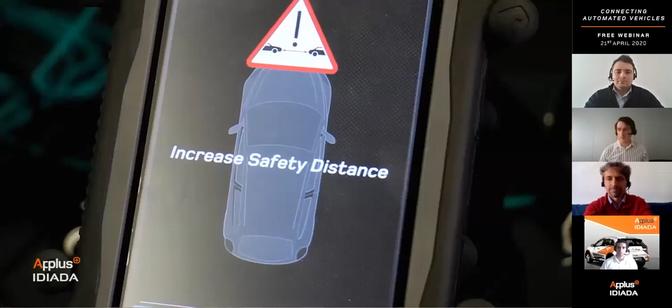So I hope that gave you a flavor of IDIADA's capabilities. In terms of locations throughout the world, IDIADA is based in pretty much all continents apart from Australia. We are representing here the main centers for engineering, testing, and homologation in the form of our headquarters in Spain, our Czech Republic, our China branch, as well as Germany, Brazil, India, US, and also UK.

We also have branch offices where we have key account managers like myself based and/or homologation representatives supporting us with local regulations to be able to best support our customers. In total, we are 2,750 worldwide, and we believe that we are offering comprehensive services to our customers in the form of full development from engineering, testing, as well as certification support. Next slide, please, Dave.

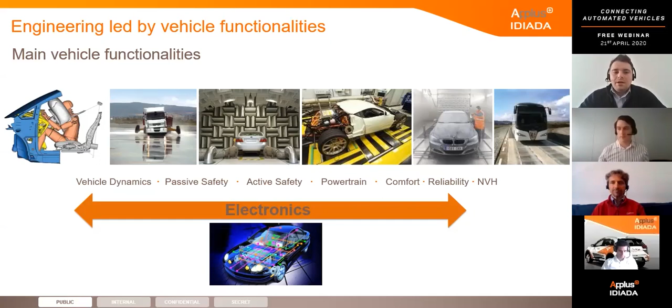As you've seen in the video just a minute ago, IDIADA has capabilities in all vehicle areas, and we have knowledge in main vehicle functionalities in which electronics play a key role, and we have around 100 people worldwide supporting with that. So we are supporting our customers with vehicle dynamics, passive safety and active safety, powertrain, comfort, reliability, NVH, but not only. Next slide, please, Dave.

Now, focusing on electronics, as I mentioned before, we have a team of more than 100 engineers based in our headquarters in Barcelona, Spain. A second team in terms of size is based in our UK office in Cambridge, and three more project-based teams in Pune, India, Germany and Czech Republic.

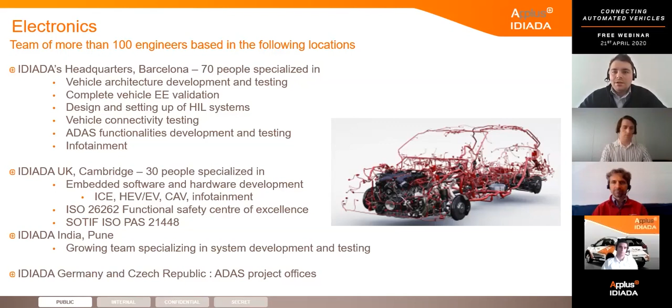In headquarters, my colleagues will explain further, but we have a variety of services that we are offering to our customers, not only in the ADAS field, but in traditional electronics as well. In the UK, we have more of a focus on connected vehicles, on functional safety, and SOTIF more recently. Next slide, please, Dave. So I'm going to hand you over to Dave now, who will introduce the IDAPT in more detail. Hi, thank you very much, George.

As I said earlier, my name is David. I'm heavily involved in our connected vehicle and V2X activities, and one of my additional roles is also the product coordinator for our IDAPT unit.

So essentially, what is IDAPT? In summary, IDAPT can turn a non-connected car into a connected car for a number of different connected and automated vehicle R&D and proof of concept activities. It was a tool that we developed in-house in our electronics department, and we're using it on a number of different projects.

We wanted a tool where we could develop proof of concepts, nice R&D activities, but we also tried to make something that could function independent to a vehicle's electronic architecture system, but also work just as well and possibly much better when it's integrated with a vehicle's electronic architecture. So that might mean something like integration to several of the CAN buses within a vehicle, also integration to additional components, whether it's over something like digital or analog inputs, outputs, something Ethernet based, USB based, other forms of ways to get into a vehicle's electronic architecture.

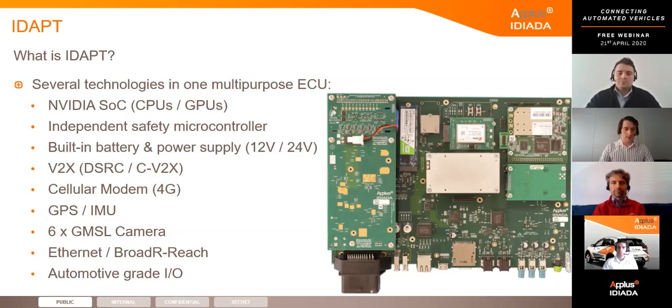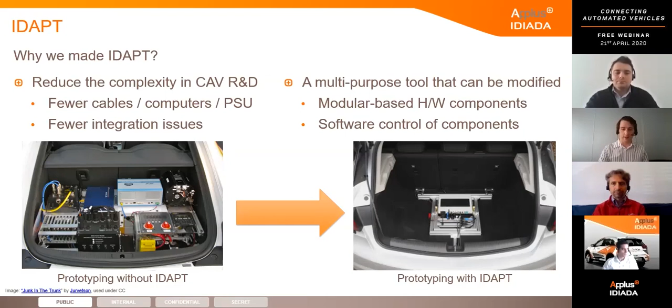And as you can see, how we tried to highlight IDAPT is reducing all these components down to something much smaller in the vehicle. And we're using IDAPT in a number of different ways. So for example, your automotive IoT proof of concept. So you may require to collect some data from a number of different sensors, aggregate that data and also push it somewhere, whether it's to some backend server or some internet-based location.

Cybersecurity R&D. So we're working on a number of projects which involve some form of cybersecurity, whether it's application-based or V2X-based. Because we have this flexibility in our unit, it makes it a lot easier to carry out those types of activities. Vision and sensor R&D. So we have camera inputs and high-speed data inputs such as Ethernet, so we are able to carry out some R&D for vision and sensor. And vehicle actuation, which we'll show a little later, is how we're using IDAPT to perform some form of vehicle actuation on a vehicle. And also V2X R&D.

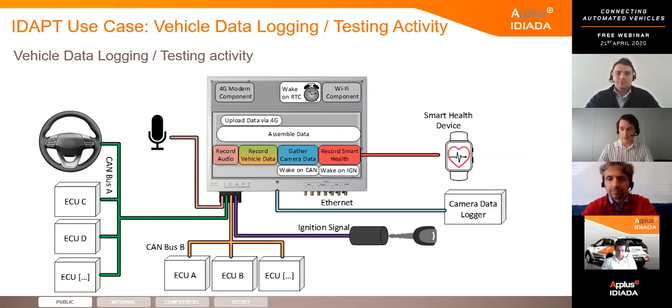So I will pass over now to my colleague, Javi. Thanks, David, for the introduction.

So in 2018, I was part of the team who developed IDAPT as a tool for the rapid prototyping of autonomous driving systems, with the main goal of having a flexible tool. However, at that time, we did not have an application. We were showing the capabilities, the real capabilities of the tool.

So in 2019, IDIADA management decided to develop a robotaxi service at IDIADA facilities, but with a constraint of developing it in 1 year. This was a challenge for me and also for the team, but we were convinced that with this tool and this framework we could develop it in time. So in the following video, you can see the concept car that we developed. David, can you?

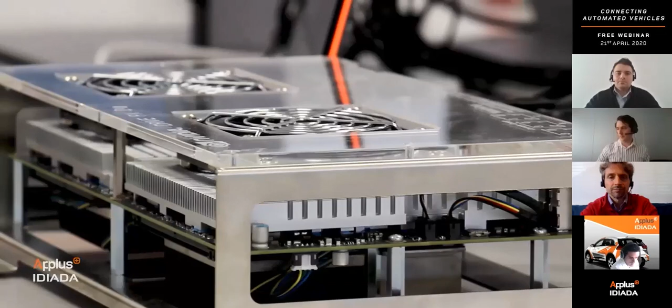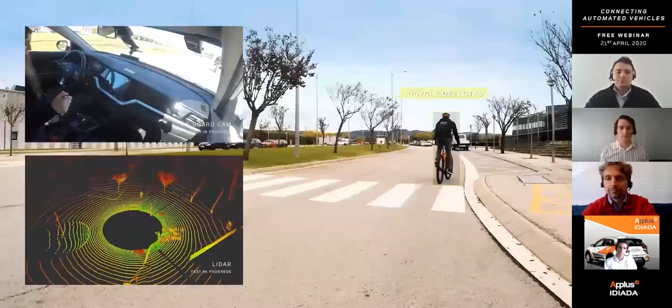IDIADA has aligned its development and validation expertise to engineer a Level 4 autonomous car, meeting the functional requirements necessary for safe operation within its headquarters. Using an HEV production car as a base, we have developed, designed and integrated an array of connected and automated vehicle subsystems and supporting devices. The vehicle is equipped with a computer platform for autonomous and driver assistance, the IDAPT, a multi-purpose electronic control unit developed by IDIADA, as well as multiple perimeter surveillance sensors. The development, integration and validation tasks undertaken by the different teams of CAV experts enable the CAV Ride to predict and understand the road environment for safe, driverless navigation within IDIADA's headquarters premises.

Okay, so basically CAV Ride is a level 4 robotaxi offering a service in our facilities, allowing our clients to request to be picked up. Then they can select the stop where the vehicle shall go autonomously.

As you can see, the operational design domain or ODD of our vehicle at the moment is very small, but we have been able to demonstrate with our toolchain how we can develop an autonomous car. In the following years, we will be increasing the ODD of the car in order to make it work not only at IDIADA facilities, but also outside, for example, in cities. David, next.

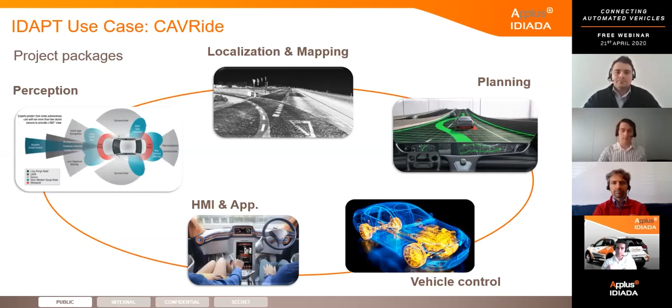Our perception system processes data from sensors into structured data that can be used for the next planning and control algorithms. This is where most of the vehicle analysis takes place. This subsystem is composed of software components such as lane detection, traffic sign recognition, object detection, and free space detection.

One important thing to remark is that we were using data from different sensors, and we were also developing data fusion algorithms. Another important part to remark is in positioning, where we were also using HD maps.

At IDIADA, we not only have physical facilities, we have also scanned all our test tracks, and we can use such digital maps to develop positioning algorithms. Those maps can be used not only during the development phases, but also for verification phases in the real testing activities.

Once the sensor data is processed by the perception system, it can be used by the planning module we have developed. This module is divided into three main parts: the route planner, responsible for deciding how to go from point A to B; the behavior module, deciding which maneuvers the vehicle should take; and the trajectory planner, deciding the trajectory the vehicle needs to follow.

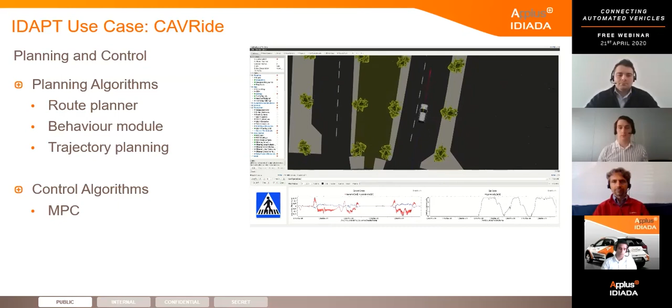I would also like to remark on the flexibility of IDAPT, because one of our constraints was to use MATLAB Simulink, since part of the team preferred to use this framework for development activities. With IDAPT, we were able to implement and integrate Simulink models into our project.

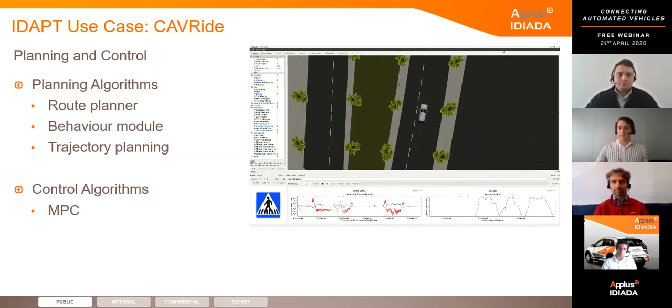One important part of the project was the HMI concept. One important thing to remark is that HMI is no longer only what is inside the vehicle, but also what is outside. The vehicle had an infotainment system where the driver and passengers could interact, but there were also external users with a mobile application where they could call the vehicle itself.

For developing that structure, we had three main modules. One was the infotainment system, inside the car, communicating with the autonomous driving system. There was also a backend server managing all the calls from inside and outside the car. Lastly, we had a mobile application.

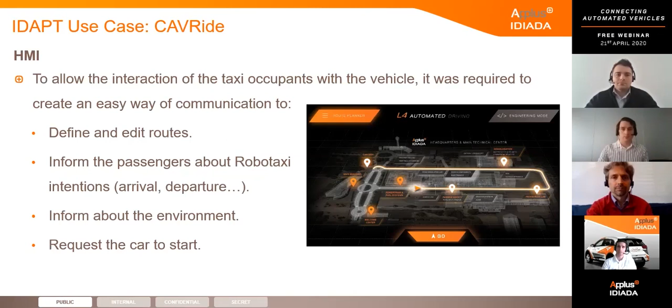I think one of the important things to remark in this part is that human-machine interaction is quite relevant in the development of an autonomous car. The process we followed was to work with a human factors team, because they are experts in defining requirements for this kind of application. We started by defining the use cases where the vehicle should go, and then from this they started to design and define an HMI concept.

We had a team dedicated to the development of the infotainment system, backend system, and also the mobile application. We developed all those features in iterations, because many things that were being defined were very difficult to implement, so we needed a lot of refinements. It's also important to remark that we were in contact with our marketing team in order to get the look and feel for the project. These are basically the steps we followed for the HMI.

So, this is the robotaxi prototype that we have developed at IDIADA. I invite all of you to take into consideration IDAPT and the IDIADA team for developing your AV systems.

Let me introduce the next presenter, Charlie Wartnaby, who is our technical lead of the MUCCA project and also has a lot of experience in connectivity and automated driving systems.

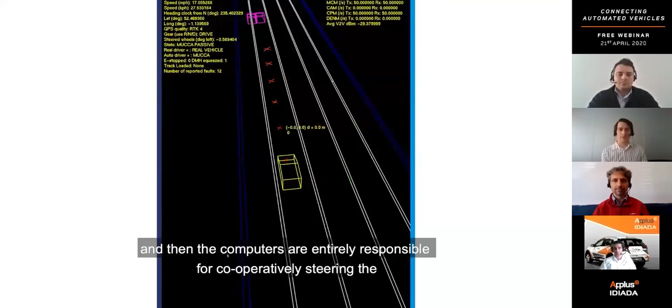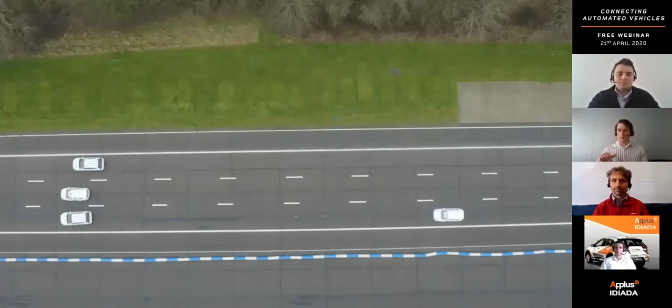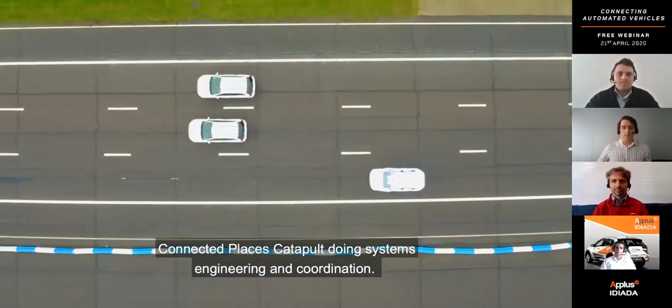Today we're at the Bruntingthorpe Proving Ground to demonstrate the multi-car collision avoidance, the MUCCA project system. What you'll see today is two vehicles approaching dummy obstacles. For the trial, we set up the situation using safety drivers, then they both hand over control to the computers. MUCCA has control, and the computers are entirely responsible for cooperatively steering the cars around the obstacles, working together using their vehicle-to-vehicle radio links until the scenario is complete. This is the first time anyone has demonstrated full-size cars working cooperatively together - it's like a hive mind or a shoal of fish avoiding collision. Here we just have two connected research vehicles, but in future all vehicles on the road can be connected, and they can work together for cooperative collision avoidance like this. About 1,500 people a year die on UK roads, and our objective is to reduce that number through automated collision avoidance of a really advanced kind. The MUCCA project is funded by the UK government, by the Centre for Connected and Automated Vehicles, with a total budget of £4.5 million, and we've been running for 2.5 years now, so these tests are the culmination of the project. The partners were IDIADA, doing overall lead and software integration, Connected Places Catapult doing systems engineering and coordination, Cranfield University working on algorithms, Cosworth Electronics working on perception and data logging, Westfield Sports Cars on test management, and Secured by Design on cybersecurity. We see this project as a springboard into further connected and automated vehicle technology projects, putting the UK at the forefront of this kind of work, which we believe is going to be really big.

Great, thank you, David. So I'll go on to the next slide. There wasn't a lot of technical detail there, but I guess quite a few of you in the audience are reasonably technical, so I'll tell you a little bit more about how it actually worked. Firstly, MUCCA was entirely an IDAPT project. IDAPT was first developed with MUCCA in mind, but also with other projects in mind, so we built in that flexibility to be able to use it for other things.

Now, you saw the key thing in MUCCA is that the two cars were talking to each other - they were cooperating in real time. So the vehicle-to-vehicle messaging was absolutely fundamental to this. We used ETSI draft messages, which aren't quite standard yet, to achieve that.

The main thing is that we used a maneuver coordination message, which allows the two cars to share trajectory plans, and that's how they actually achieve cooperation. There's also a collective perception message, which they use to share knowledge of the world. So if one car can see another car in front of it using its camera, it can transmit that knowledge to the other vehicles around it, so that all the cars end up with a unified, extended worldview. Those were two really nice features, entirely down to the vehicle-to-vehicle messaging.

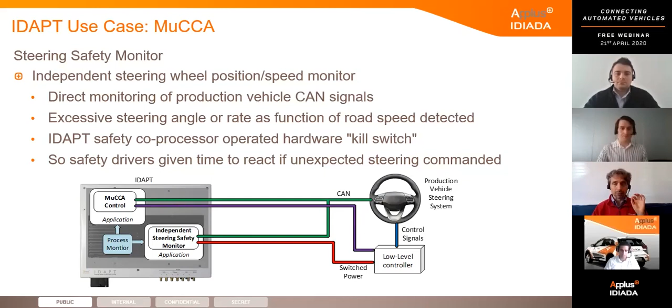Okay, next slide, please, David.

So I'm going to show you one more video, and this is the last part of MuCCA I'll show you. And this is going to be about the test environment. So we had a hardware in the loop concept, which meant that we were using real IDAPT units, but they were all hooked up to a simulation tool, which in this case was PreScan, but it doesn't have to be PreScan. As Xavi mentioned, at HQ in Barcelona, we've also used SCANeR and CARLA, for example. And this is how we did the testing. And it also shows how the MuCCA concept could be extended to multiple vehicles. So, okay, do roll the video.

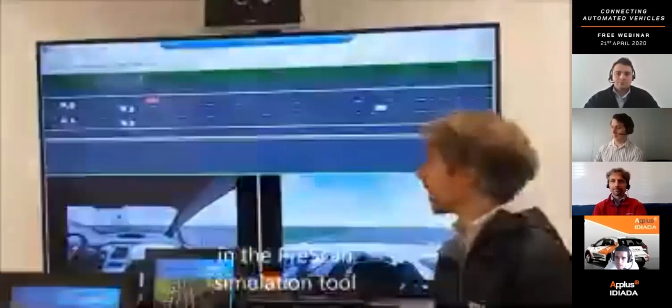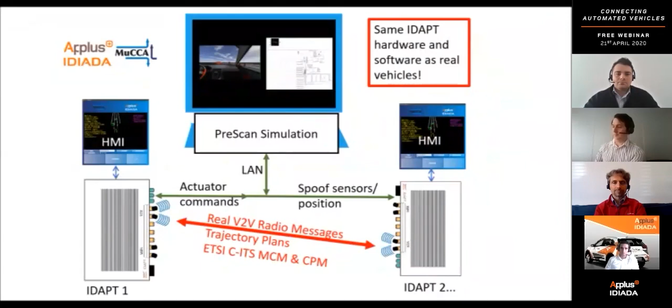Thanks, David. This is a digital representation of the Bruntingthorpe Proving Ground in the PreScan simulation tool. And each of those white cars is being controlled by a corresponding real IDAPT unit here in the room. PreScan sends fake sensor data to each IDAPT, which responds with actuator commands which control the simulated cars. Meanwhile, real vehicle-to-vehicle radio messages are sent between IDAPTs directly. So each of these IDAPT units integrates the computing and communications and positioning. Each IDAPT is connected to its own screen, showing its own view of the world. And each IDAPT is sharing its trajectory plans with all of the others via its real vehicle-to-vehicle radio.

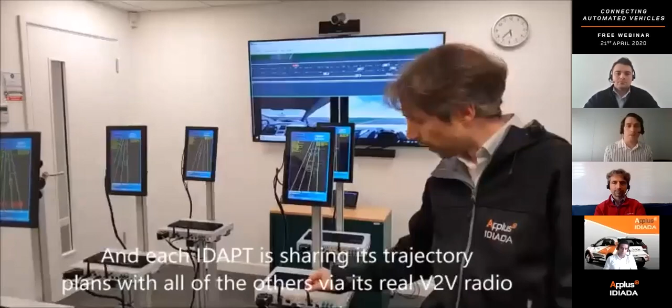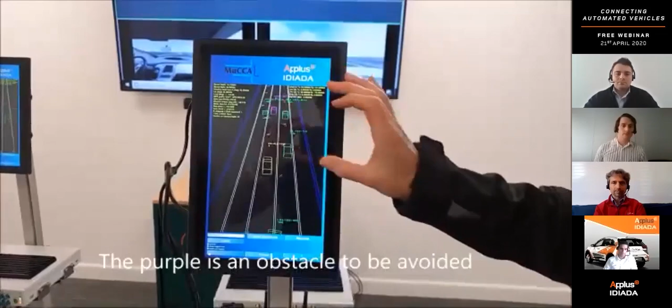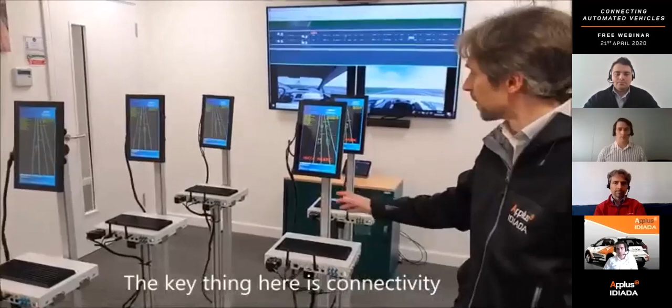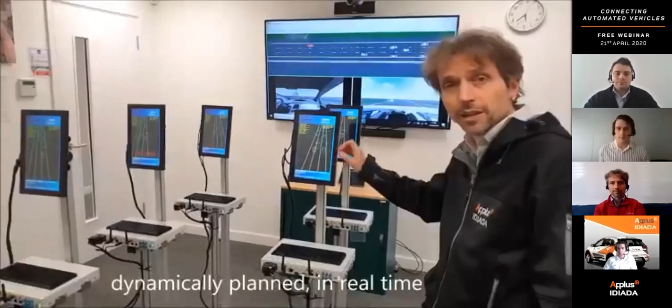Here, the yellow is the ego car, that's this IDAPT, and the green ones are ones it hears about using the vehicle-to-vehicle radio from its peers. The purple is an obstacle to be avoided. On the test track, we've shown two real MuCCA vehicles. But here in the simulation environment, we've got 5 vehicles, which shows that the MuCCA algorithms are not specific to only 2 vehicles. The key thing here is connectivity. What's happening is that each IDAPT is communicating its trajectory plans with all of the others, and that's how, together, as a group, they come up with a solution to the scenario, dynamically planned in real time. It's not scripted, the computers are working it out for themselves.

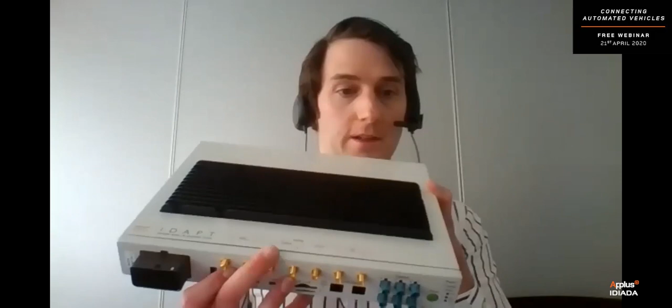So what we have here is the IDAPT unit itself. As I described earlier, there's a number of different connections on it. So your wireless interfaces, your BroadR-Reach, your SD card, your SIM card, your HDMI output, Ethernet, USB, and your traditional automotive ECU connector. We have our antennas at the front here, and a nice big heatsink on the top to keep everything cool.

And finally, I'd just like to try to switch cameras at the moment. Wonderful. So what we have here is one of the IDAPTs from the demonstration you've seen earlier. It might not be that clear from the camera, but we're just collecting a number of different, let's say, CAN messages from other sensors. So this is generated from a CAN tool. But one of the nice things about it is that it's quite flexible. So at the moment, we're doing some form of CAN-based application using 2 of the CAN networks or CAN channels

available from IDAPT. But there may be times where you are, let's say, waiting for a colleague to remotely log into IDAPT to update software, for example. And this was one of my requirements, that when you're waiting for your colleague to update his code via something like SSH or Telnet, then maybe you want to play something like Doom while you're just waiting for him to update. And that is it from my side.